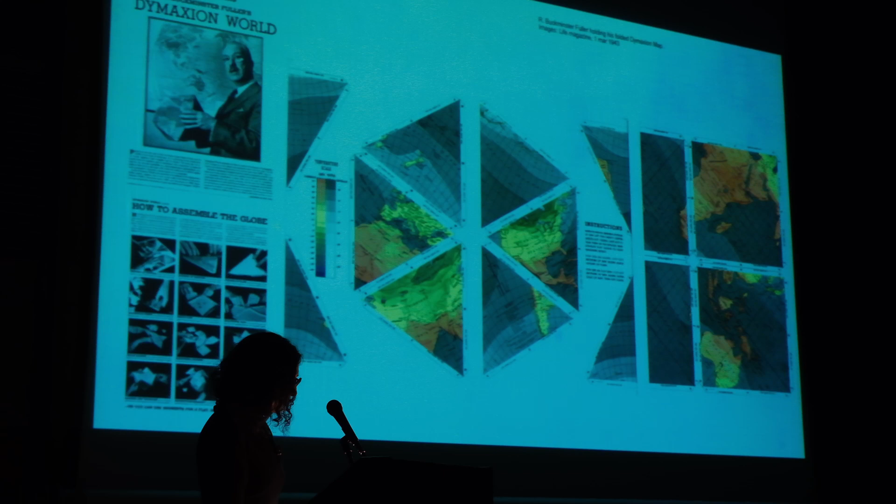I would like to start, if I make this work, by looking again at 4 cartographies produced at different times in the 20th century, which represent early efforts to situate the Americas culturally, and South America in particular, in a global context. This is Buckminster Fuller's Dymaxion World, produced in 1943 and published by Life magazine in New York. In this representation, Fuller anticipated the globalized world of the end of the century as a single continuous continent. It is a dismembered but unitarian Pangea presented without considering the reality of the magnetic pole as a guiding axis.

It presents us an image of physical unity that speaks of hyperconnection, of possible migrations from one end of the globe to the other, that dismantle hierarchy and open up new points of view about the definition of unit, borders, and edges. The large continental island makes it possible to amplify ecological, cultural, and social implications of the world order, which today are topics that structure contemporary political debate.

A counterpoint to Fuller's global vision is a series of drawings of South America published in the poem Amereida in 1967. The epic poem Amereida, a direct reference to Virgil's Aeneid, is a choral work derived from the notes, drawings and experience of the land journey made by teachers from the Valparaiso School of Architecture and their guests in 1965, 2 years before its publication. It is also the founding text of the first Chilean architectural avant-garde, which emerged during the 70s and founded the open city of Ritoque, facing the Pacific of Chile's central coastline.

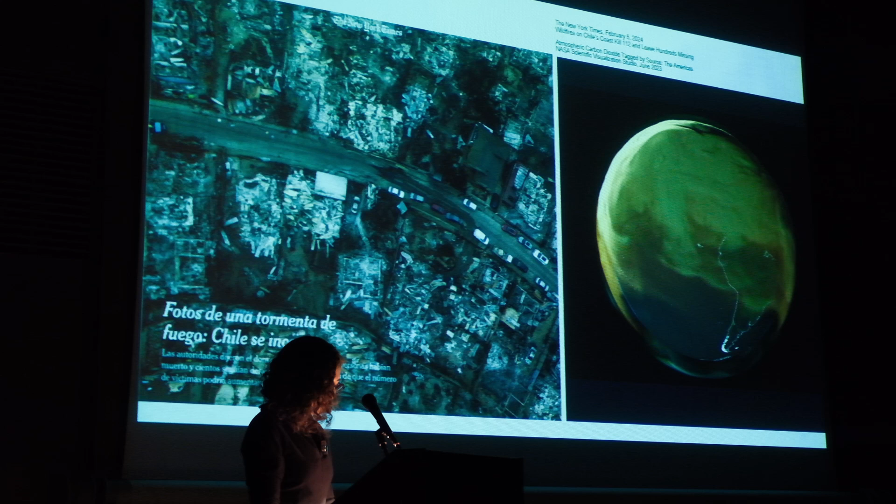That is why some initiatives that seek to influence global agendas, such as those proposing global moratoria on construction, stop demolition, and others, do not seem to be the most efficient answer for the urgent need we have on the planet, and do not seem to fit in these scenarios of enormous deficit. At least they should not be adopted without adjustment, without translation, or at least without distortion. Somehow America must once again insist on that south that is north, of that inland sea of the mid 20th century.

In any case, and returning to the action of repairing and the damage that activates it, Chilean art researcher Ariel Florencia Richard writes in the catalogue of the latest exhibition of Marcela Correa, Chile's most important contemporary sculptor, I quote, "Cracks mark a break in the landscape and always signal something that changes. They are an interruption in what was continuous. One does not usually talk about the benefit of cracks, and I say, they are a respite, a good interruption, because the wind blows through the crack. They oxygenate, they ventilate, they generate new air."

I will now present some projects. All are linked in some way to the action of repairing, and all offer opportunities for the present. The first seeks to repair a historical debt.

Invited by the renowned Chilean visual artist Josefina Guilisasti in 2021, we won a public competition to build the first urban sculpture dedicated to women to be installed in a public space in Chile. Recent debate over the figure of the monument determined the formal and symbolic decision taken in our proposal. It is in part symbolic, in part action. Fear of dissonance mingles in it with the need to be together and build a new social fabric.

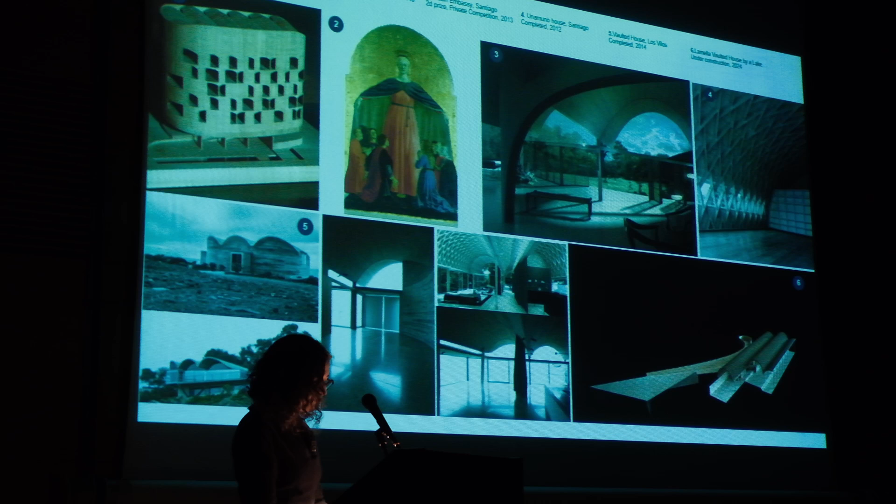This project, developed jointly in 2019 with Paula Velasco, Dr. Joseph Schwartz, and Pierluigi D'Acunto from ETH Zurich, in a competition for the design of Arauco headquarters, sought to achieve clean and restful wood surfaces in a highly transparent and light-filled space, aided by the precision of prefabrication methods in wood construction.

The exploration of material addressed the way of combining the structure and ambience in a single entity by removing most secondary elements. It focuses on the vault as a supporting structural element capable of producing a qualitative spatial effect. We came up with a system that solved the structure, the floors, and the ceiling, as well as technical spaces for the network of installations inside the building, by using a single construction component, thereby expanding the range of flexibility for the organization of the plan.

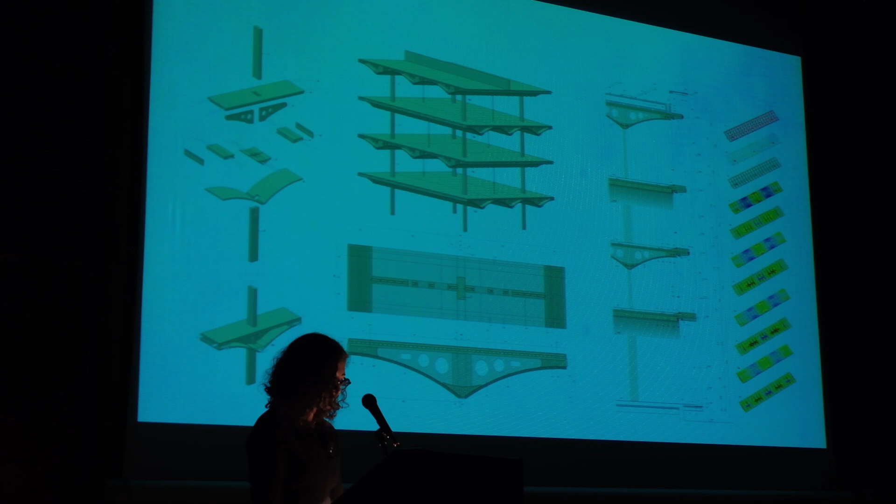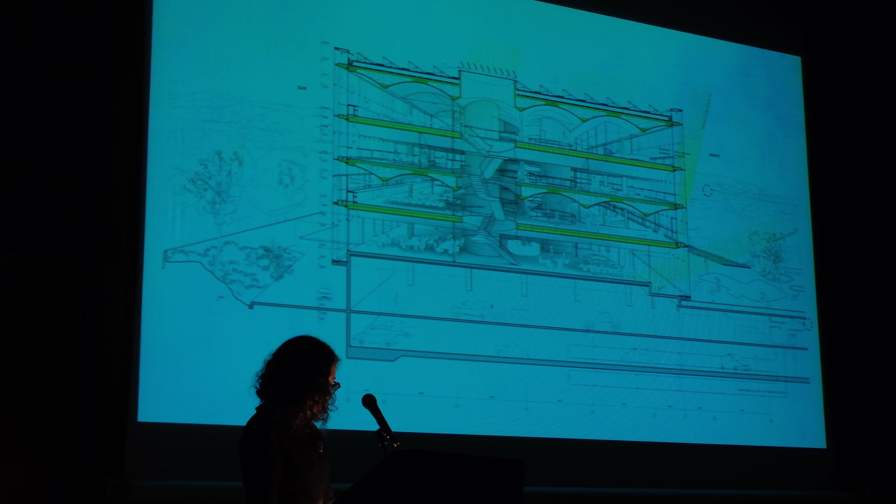The supporting structure consists of a system of columns and wooden slab composed of unidirectional strips with a hollow cross-section of almost triangular shape, supported by solid columns made of laminated wood. The slab element will be assembled using post-tensioning cables linked to the wooden elements located in the top and the bottom of the beams. The 90 degrees change of direction of the beam from one floor to the next allows each beam to be supported every 18 meters by columns and vertical traction cables. The reinforced concrete cores are activated to resist wind and earthquake, as well as other sources of lateral load.

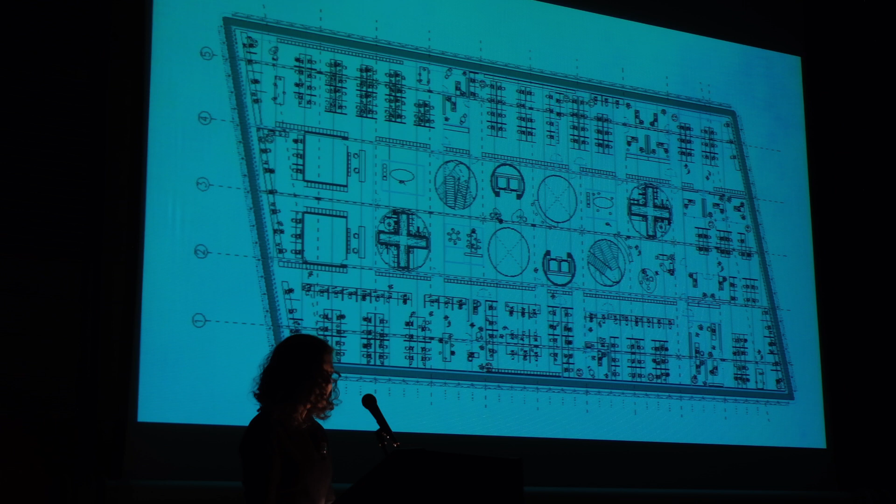From its synthetic nature, the structure of this proposal embodied much more than the mere solution of load transmission or the stability of the building. Rather, it brought together in its own reality the material, atmospheric, and orderly dimension of the project, while enhancing its performative capacity. At first glance, it appeared to be a concealed structure. However, it is very much exposed.

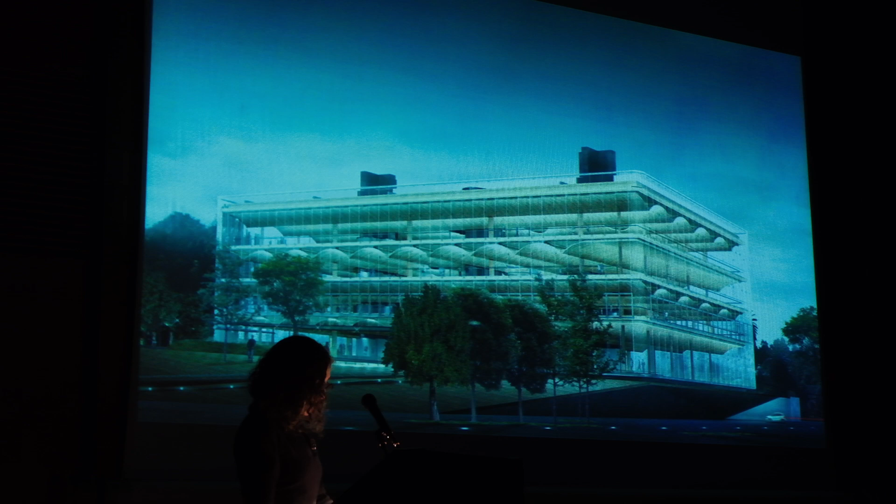Everything we will have seen in the building is structure. Every surface making up the space is both architecture and structure. Floors and ceilings are two sides of the same component, precisely designed and calculated to meet architectural and structural requirements simultaneously and as efficiently as possible. Nothing is surplus, everything is bone.

In a similar vein, but after the pandemic, our studio experienced a sharp decline of work from which we are only now beginning to recover, as many other offices around the world. Only a few houses came our way, all located in rural or coastal areas. We have come to call them the houses without corridor.

The first project was for an older couple who wanted a home for themselves, but with enough space to accommodate their adult children and families. The design had to be flexible, able to function for the couple alone as well as for the expanded group. The second was a standard family, quote, family: father, mother, and 4 children. The third, again for a couple, had the added function of hosting their adult daughter and elderly parent.

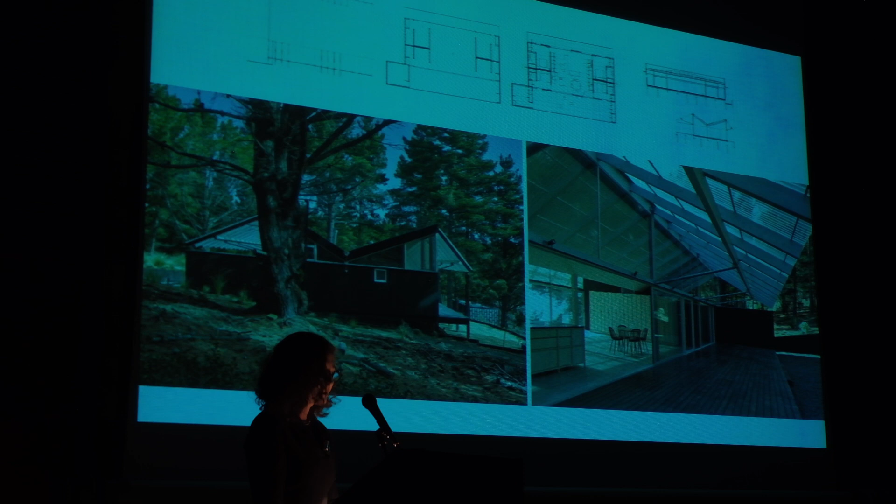All three houses were constructed using radiata pine, modeled with CAD work and connected to a CNC machine for precise manufacturing of each wooden piece. The assembly process on site was akin to building a large-scale Meccano set where numbered components easily fit together. This is one of the houses built on the coast. This approach allows us to offer an efficient solution from both an economic and environmental standpoint, while also ensuring a fast, clean, and precise construction process.

This is the second one. Each house incorporates polycarbonate covered verandas which provide protected outdoor spaces without sacrificing interior light. Some of these projects are still under construction, like this one.

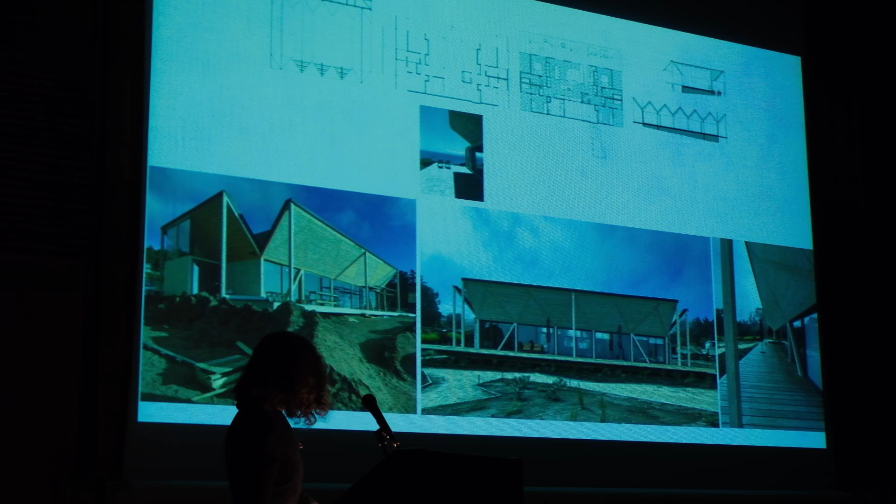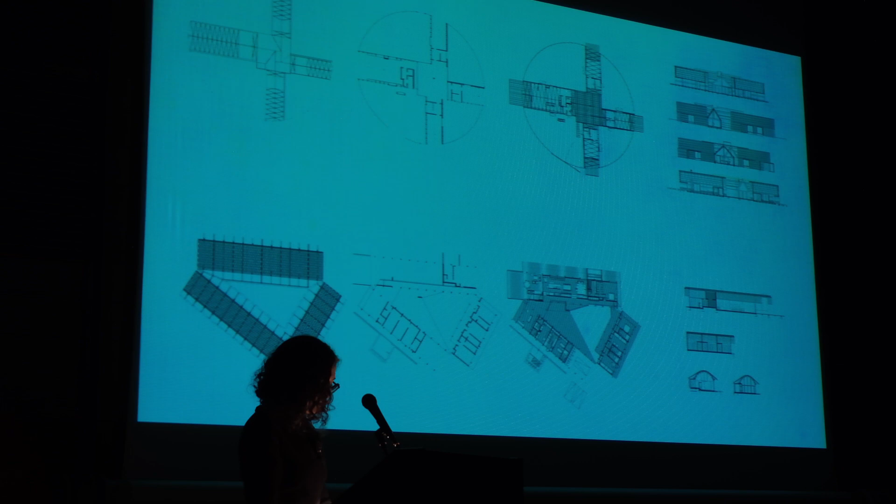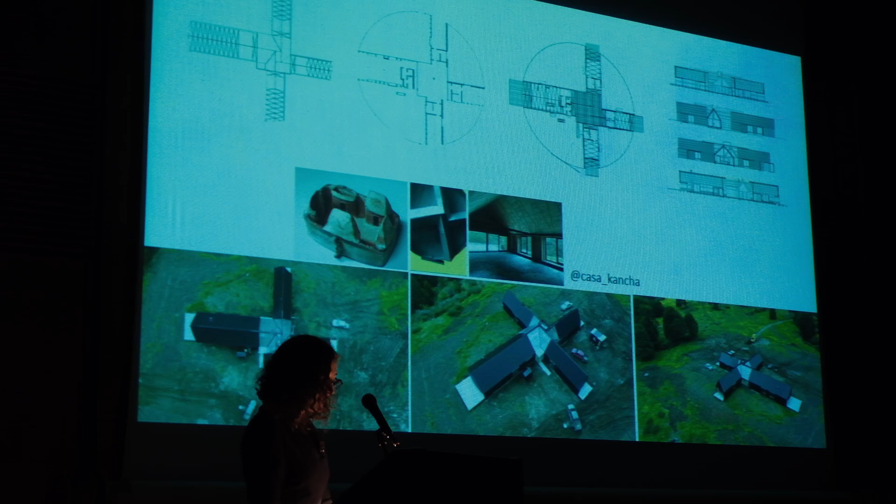Using the same construction system, we built two additional units, this time in the form of articulated pavilions. The first is an artist residence in Patagonia, inspired by the traditional Inca kancha. The design included a perimeter fence that defined a small-scale domestic territory, while also serving as a mediator between the residents and the surrounding geography of the Río Valle Valley in Aysén. Within the enclosed area, 4 pavilions are grouped and arranged around a greenhouse, organizing the public and private spaces in the residence.

The final house in this series features 3 pavilions arranged around an inner courtyard. The structure used the Zollinger system, which consists of small section wooden slats, creating a clean open hall beneath which the various functions are organized. Each pavilion serves a specific purpose and can operate independently one of the other.

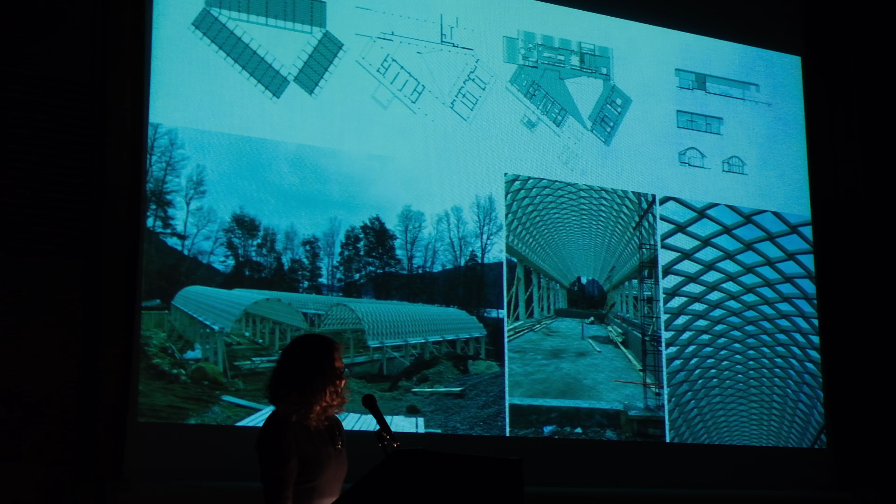This project is the Queulat National Park public infrastructure. It was a competition we won in 2016. It has been built, but by phases. They started with the path, the corridor, all the trekking areas, and we hope someday the rest of the project will also be built. This is what it's about.

This project was made in a protected area, so the strategy was to define a prefabricated element that was to be mounted on site without making any kind of movement of the land. So we decided to really focus on elements that do the least damage, minimum intervention on the site, so as to be able to dismount this structure and keep the site as it was before.

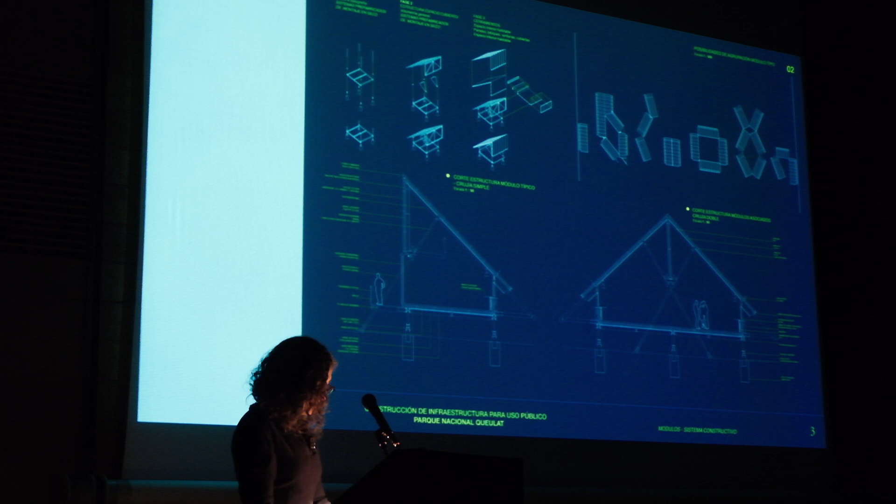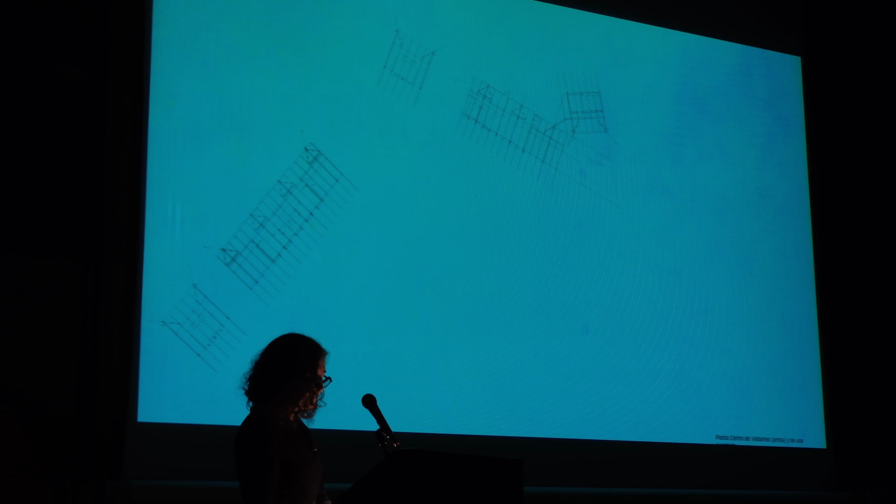The project considers a series of buildings that will house 3 visitor centers, a ranger station, houses for the park rangers, a mountain lodge, camping facilities, among others. All of them were designed departing from the same structural module, generated from a single bay, 6.1 meters wide, and a mono-pitch roof section. The association and combination of this generic unit allows deploying a variety of layouts. And here, I don't know if it is clear for you, there are the plans of the 3 centers, the main structure of the system in the park.

The 6.1 meter wide bay could accommodate at the park the National Forest Corporation offices and houses along the park, and offer the possibility of enclosing a small portion of the forest to create a courtyard-like space that serves as a mirror to the different areas of the large visitor center at Ventisquero Colgante, which is the bigger part of the park.

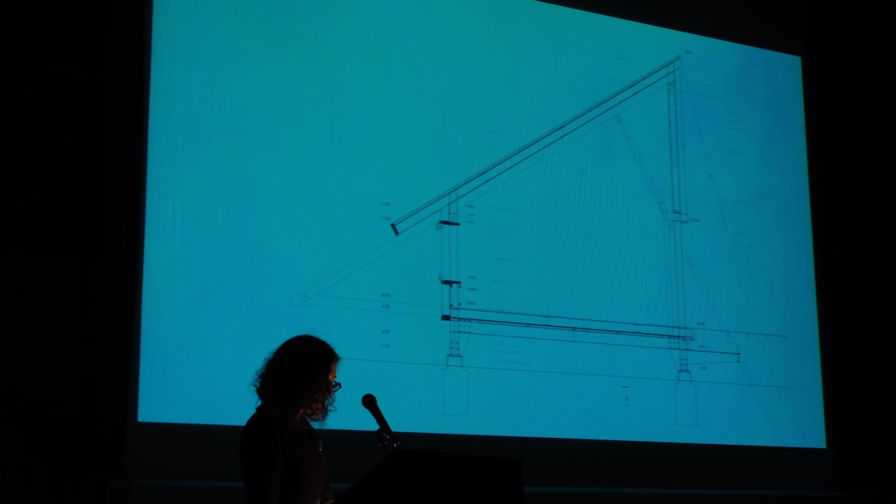Here, some part of the exhibition areas inside of the visitor center. And the project also considers a small structure to protect the trekkers around the park, and also the construction of bridges, paths, and many other constructions to protect the parts that are very, very fragile in the region. So all the structures are solved with the same material palette and also the same structural development.

Maybe, I hope this will work. Let's see. It's a video that shows a little bit of the project.

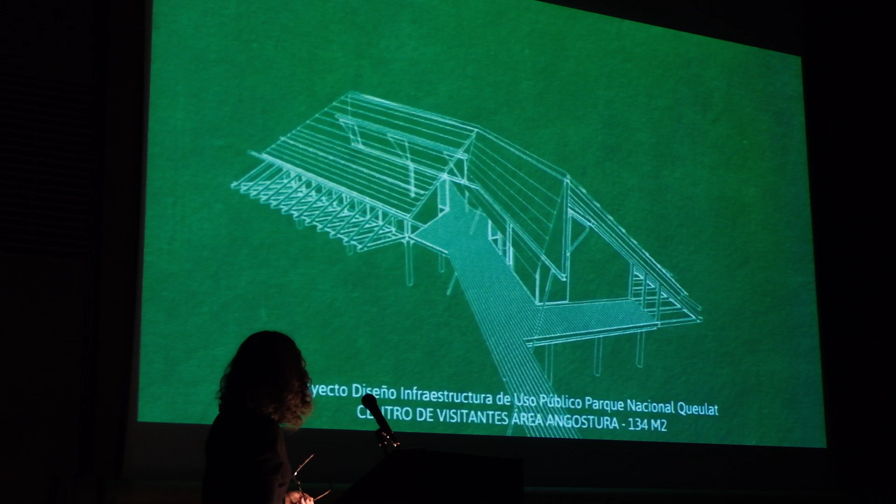Each of the centers had an exhibition area that is connected to the particular characteristic of the particular site of the park, among other facilities. This is the main part of the park, where many other facilities are located, and where administration of the park is also present in the building. There is an auditorium, exhibition area, a cafeteria, services for the public.

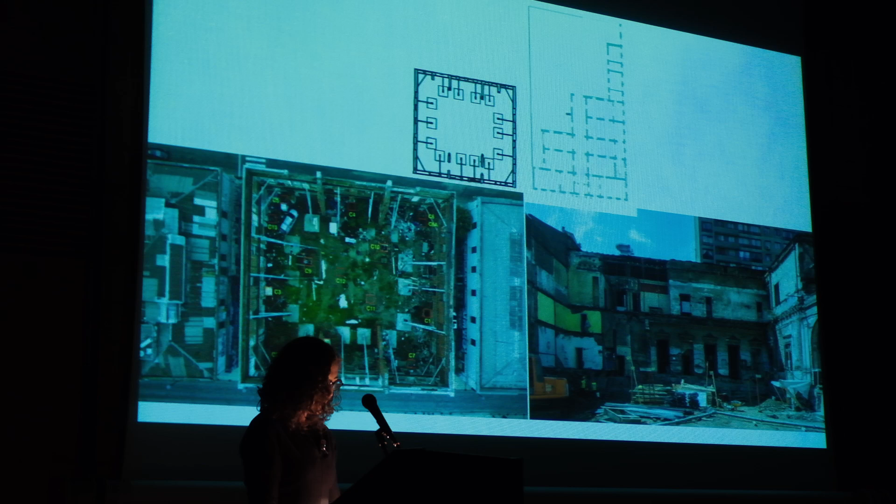In our context, these voids waiting to be occupied are often degraded structures from the late 19th century. On the left, you can see the ruin of the Palacio Subercaseaux in Valparaíso. On your right, the emptied central space of the Palacio Pereira in Santiago. Unfortunately, here you cannot see what is in there, but it's a diagrammatic representation of the operation that each of the projects are involving. Earthquake and fire have taken their toll, but have opened opportunity to infill and introduce new construction. They can reinforce our structure and at the same time update outmoded spatial systems.

The first will be the National Archive of Valparaíso, on which we are currently working after winning a public competition in 2022. The building should start the construction stage at the end of 2025. We hope that will happen, which is something not always sure in our country. Valparaíso was Chile's main port during the 19th century and has a particular urban morphology that has driven a process of adaptive urban occupation.

I hope this was not for me. No? I am in time.

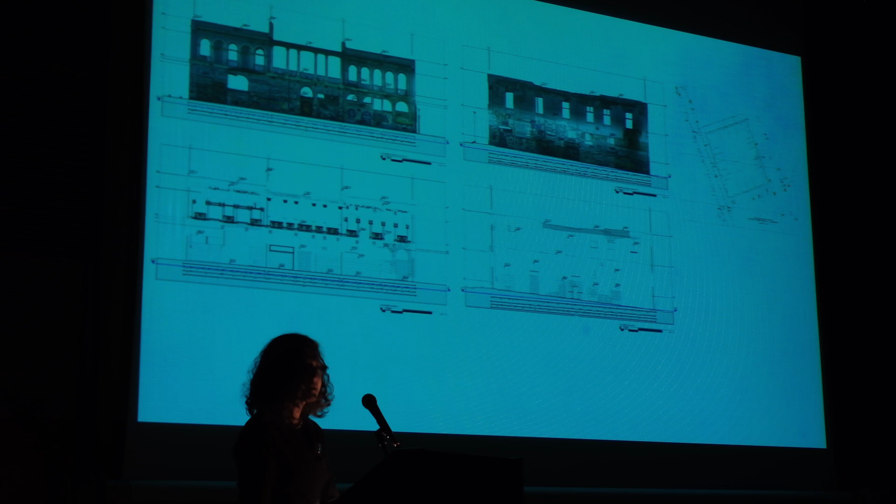This dilemma forces a new focus on the building as facade. The conservation and restoration of the facade and a few other building elements that are still preserved comply with the Venice Charter to ensure their permanence without questioning or prejudice, thus adapting the intervention to what is pre-established by the existing structure. But when what remains is only the surface and not the architectural substance, a new approach is necessary to avoid the inherent risk of resorting to facadism, in which the packaging hides a contemporary body in disguise.

This creates a double negative effect. The new is embarrassed, while the old no longer makes sense. The new building filled the space left by the gas explosion that destroyed the entire interior of the building in 2007. The facade and its interior are interlocked. This structural connection offers a fine and fragile texture giving density to the space that mediates between one materiality and another, between one time and another.

The supporting function between the new interior and the fragile existing facade is ambiguous. Is the original masonry facade what supports the technical space of the archive, or is it the archive that holds up and strengthens the original facade? We don't know how to answer this question. Instead, by concentrating the project focus especially on this physical and conceptual space, we can bring together conservation and contemporaneity, connection and discretion, past and future.

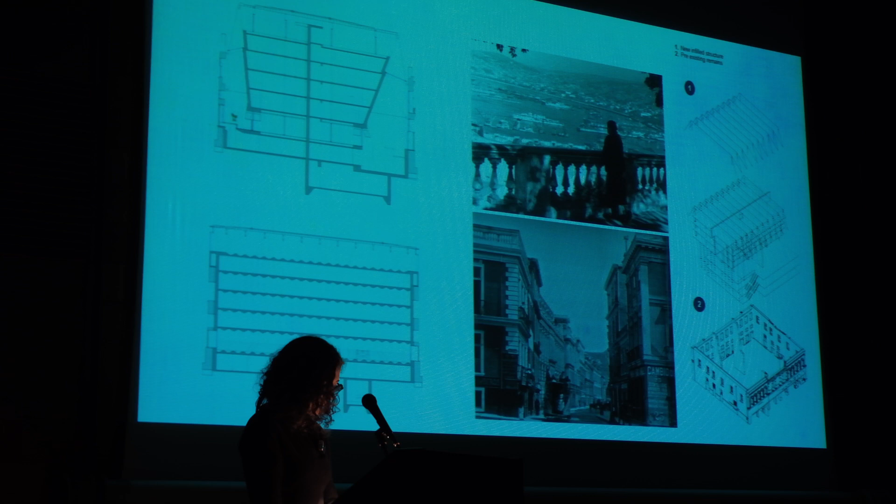Our main goal was to establish the height of the new building in order to maintain the ratio of the historic area's measurement and proportion, and to recognize the two ways to inhabit Valparaiso, from the urban and from the geographic scale. This meant a compact and dense structure which satisfied the client's requirement but defended the urban volumetry. Three vertical layers suggest a new order. Ground level, which is what we are seeing here, connecting the urban realm and the interior toward the archive offices.

Then a secondary layer, the deposit, occupies a large part of the height of the historical remain, organized in four open plans externally covered by a layer of yellow ochre felt. Finally, on top but below the roof, the third layer houses the offices of the Regional Heritage Service. And this part is connected with the big scale of the Bay of Valparaiso.

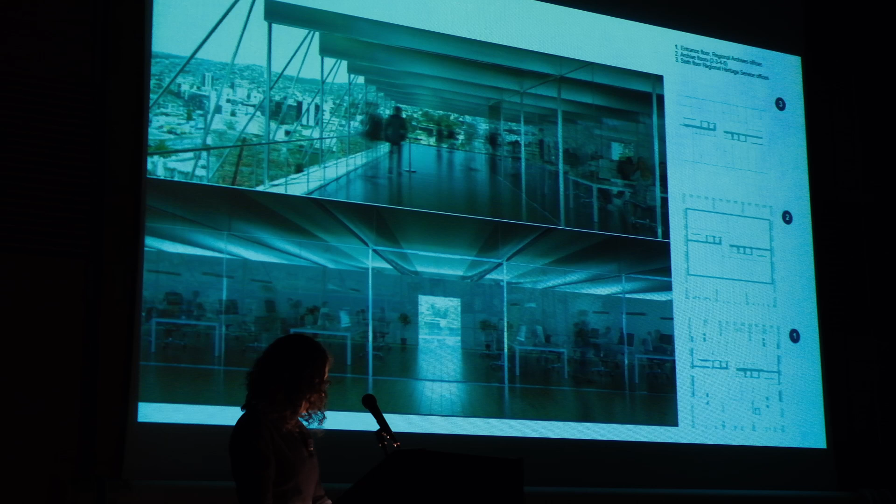The final project is the Palacio Pereira. It was developed by a multidisciplinary team and involved the renovation and restoration of a fairly damaged structure and the construction of a new building on the lot. Originally built with adobe brick and wooden structure, during its first century, Santiago was a somewhat horizontal and low-density conurbation. Our palaces, again quote, if they really existed at all, were barely mirages that hid behind ornate facades, interior gardens, and mud walls. Periodic earthquakes took their toll, and well into the 20th century, the fragile fabric that was Santiago had to be rebuilt from time to time.

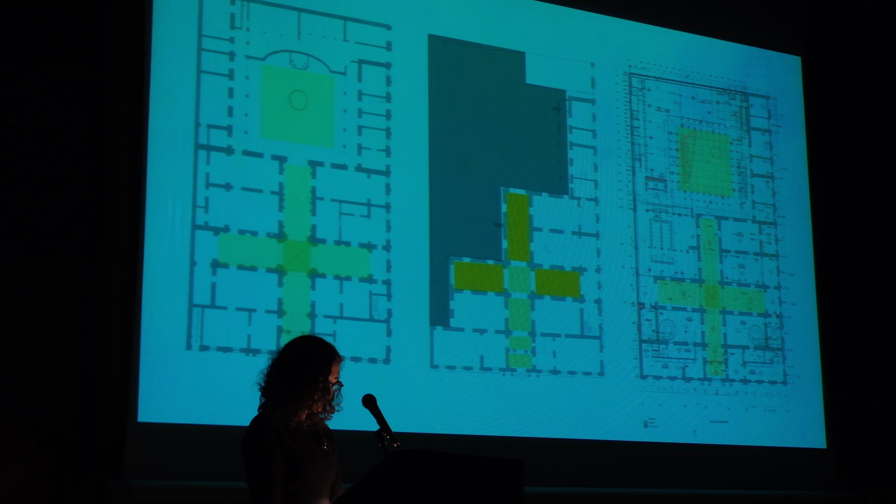In the case of this building, a large section was demolished over time, spoiling its original layout. And the center plan is what remained once we started with the project. Our project tried to recover the ratio of ground occupation as in the original setting while reconfiguring the courtyard at the back of the lot. The operation of infilling that we propose brings back the original form to the plot as originally built, while providing the opportunity to reinforce the structure of the historical remain.

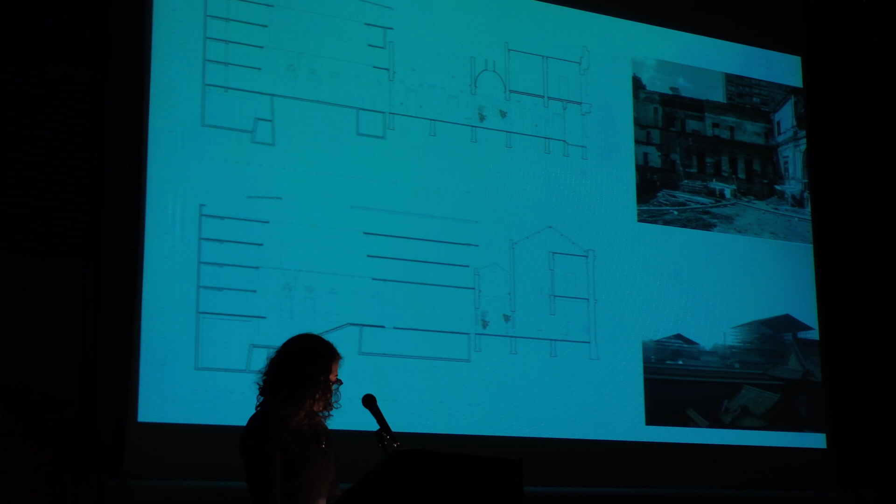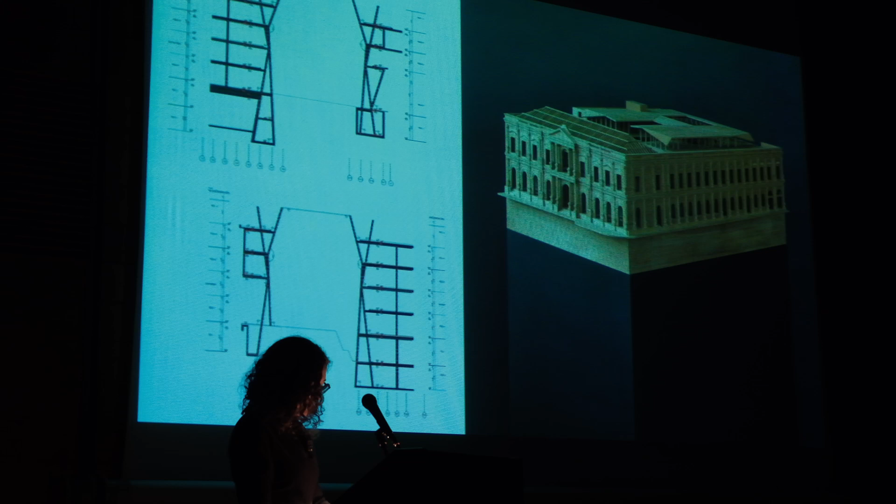This double operation also provides accommodation for several offices of the Ministry of Culture and Heritage, which is the client for this building. The new wing is basically a series of open spaces around a central courtyard that restore the urban fabric that Hénault proposed originally. Repetitive K-shaped 25 by 25 pillars in smooth concrete, separated at 159 centimeters from each other, build up the interior facade, aiming for a porous and light interior and an ambiguous borderline.

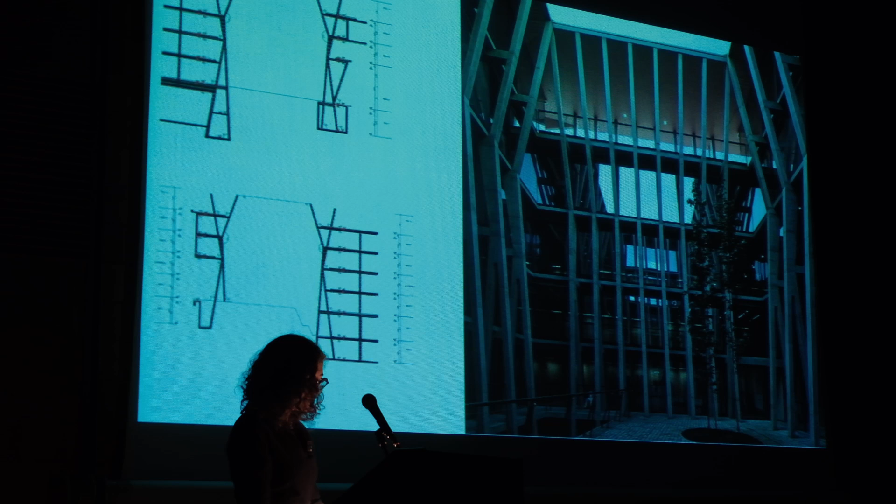That three-dimensional facade emphasized the temporary and dynamic nature of what we understand as a heritage intervention, alluding to a work in progress and a translucent lattice. The links and connection between the old and the new building are treated without ceremony. It is about juxtaposing friction and the encounter of different time, material, and technologies.

The noisy and dense isotropic concept for the structure made out of concrete columns stands in contrast to the continuity and massiveness of the masonry walls without concealing them. The K-shaped pillars stand as a memorable feature of the new structure. They provide protection from the sun and introduce an airy space which mediates between the old restored structure and the new spaces around the courtyard.

The three-dimensional condition of this borderline also creates a transitional relational space that helps understand the situation of the new building and the historical residence. It celebrates the simultaneity and coexistence of different periods and of time superimposed on one another.

Lucien Ambroise-Hénault was one of the European professionals that the Chilean state brought to the country to design work that would be emblematic for the new republic's institutional order. During his stay in Chile, he enjoyed connection to the local elite, and alongside his public work, he accepted some private commissions, such as the Luis Pereira's residence in 1872.